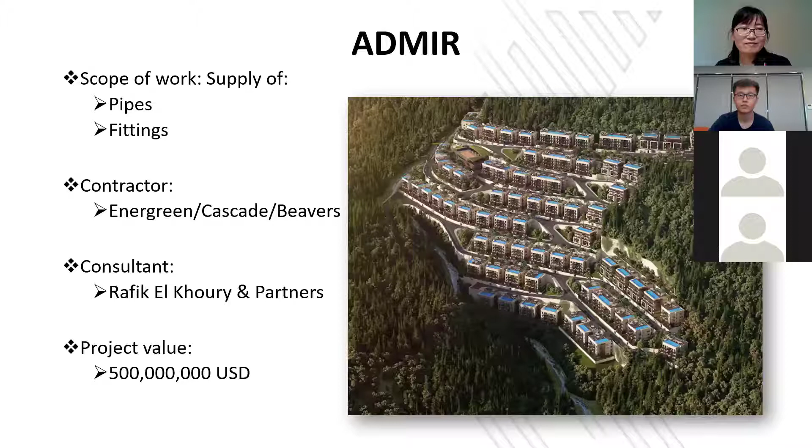So one of the good projects we have is this compound. Our team is highly effective, professional, and talented. It responds to changes in the market. We are an equal opportunity employer, and we invest heavily in the development of human resources and their skills.

We have a large supplier network all over the world, from America to Europe to the Far East, to China. Our headquarters are in Lebanon, but we have also expanded in previous years to Iraq, Ivory Coast, where we have our company, and to KSA as well, where we started and have our team.

What we offer as YARED is service and solutions for the oil and gas field, for MEP contracting and consulting firms. We also have a wholesale retail section in our company, and infrastructure, plus a dedicated team for service and after sales.

Our scope of supply includes valves, manhole covers, pipes, supports and fixtures, HVAC equipment, mainly heating, and pumps, where we represent Grundfos and Peerless pumps. We also supply flanges and fittings, fans, grooved fittings from MEIDE, and fire systems, using extensively our malleable iron fittings and grooved fittings from our partner MEIDE.

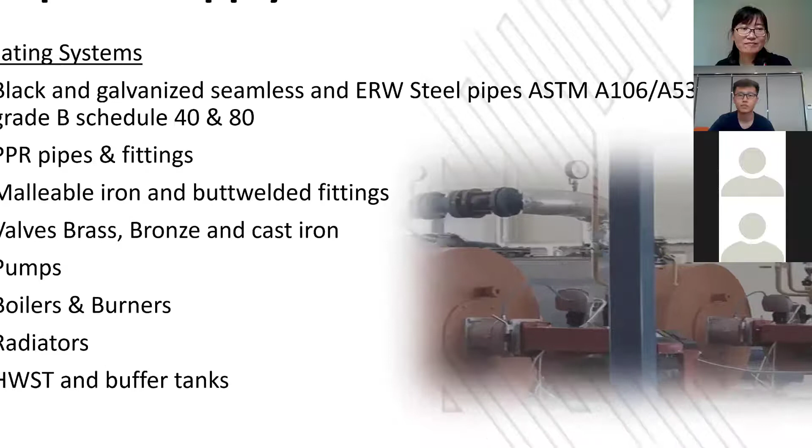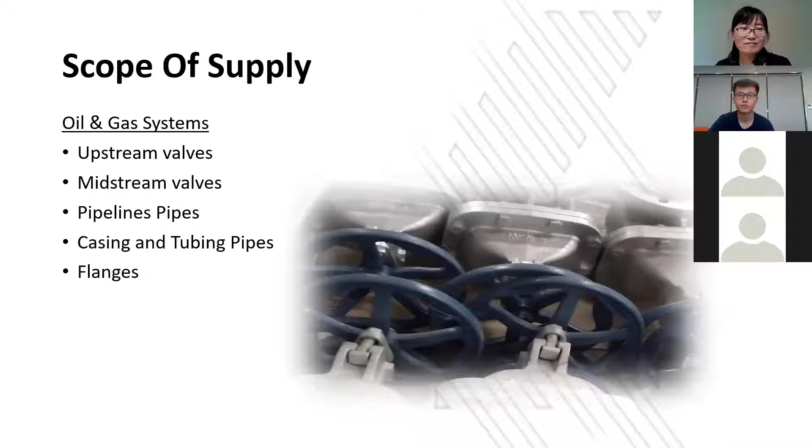We also move into pumping systems and oil and gas, where we can supply upstream and midstream valves, pipeline, casing and tubing, and flanges.

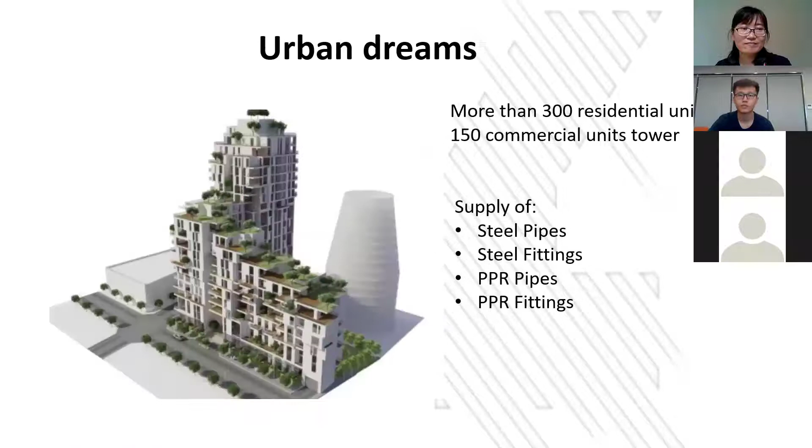In a nutshell, this is our list of projects, many in Lebanon and abroad, where we supplied grooved fittings, malleable iron fittings, steel pipes, and so on. I'll go over them quickly due to time restrictions: Admir, Galleria, Loise Hills, Beit Mesek, Ciel et Jardin in Ashrafieh, Urban Dreams, Centro Mall, Serso, and one of our prestigious projects, the Middle East Airlines Training Center next to the airport, where we supplied pumps and malleable iron fittings to install the pumps as well.

Our facility here in Beirut comprises a state-of-the-art warehouse with offices inside as well as our team.

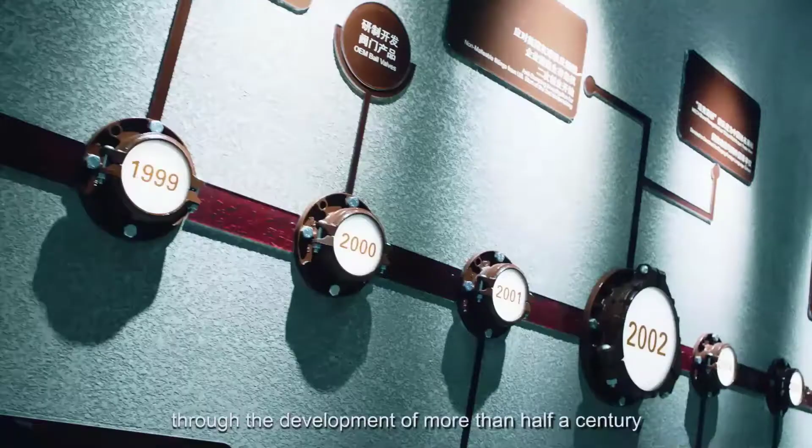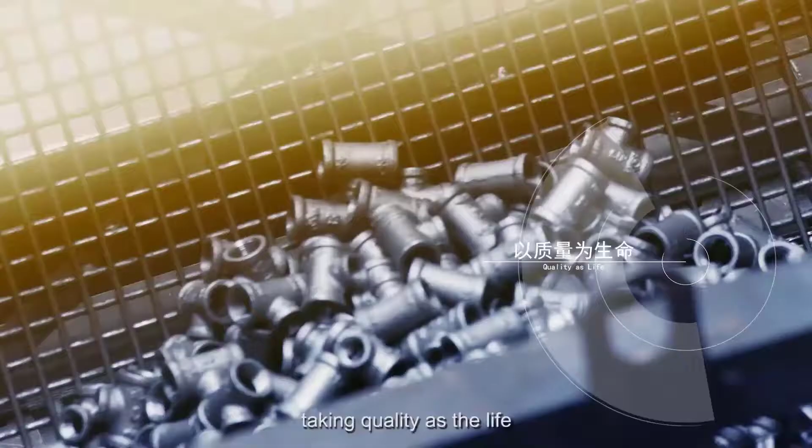Build dreams with original will and forge ahead with innovation. MEIDE Group follows its heart, focuses on each detail, and accumulates strength connecting the world. Gather strengths to connect the world. Established in 1961, through the development of more than half a century, MEIDE Group has become a diversified international enterprise group that focuses on malleable cast iron pipe fitting, grooved fitting, valve, electrical fitting, and ductile iron, and also gives consideration to equity investment. As the leader of the same industry in the world, MEIDE sticks to the core values of putting users first, taking quality as the life, promoting development with innovation, and reaching win-win with cooperation.

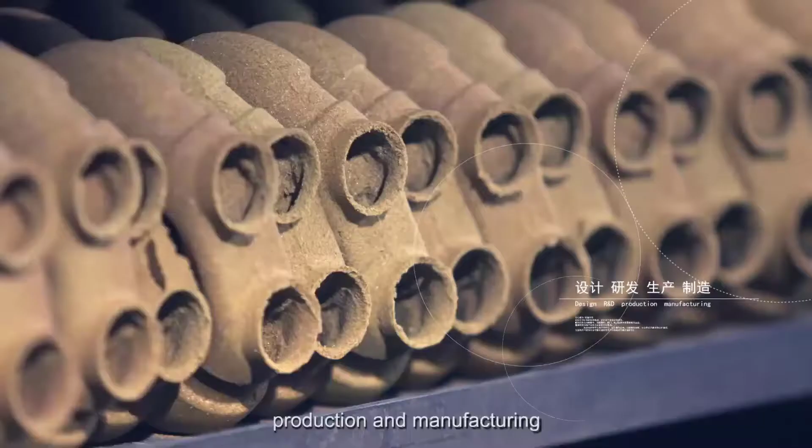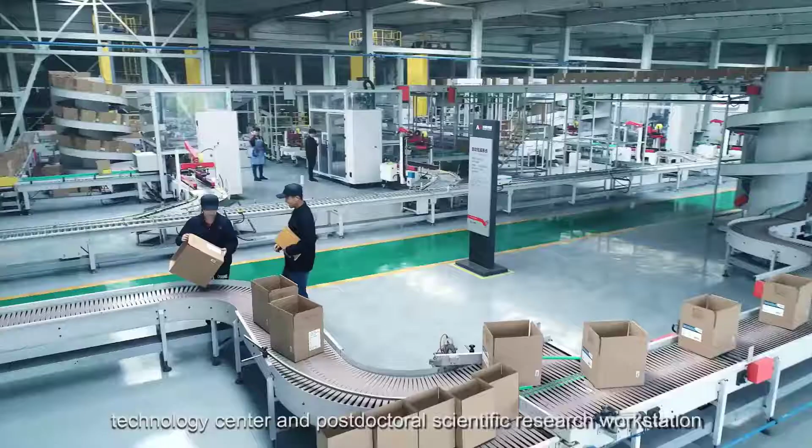Focuses on various sections including design, R&D, production and manufacturing. Extends the upstream and downstream industrial chains and creates high-quality development. It provides reliable products and smart and complete solutions for clients in the fluid conveying industry across the globe. As a national high-tech enterprise, model enterprise of single championship, and green manufacturing enterprise, MEIDE has fully exerted its advantages as the nationally certified enterprise technology center and postdoctoral scientific research workstation, and finished the transformation of production process from mechanization to automation and intelligentization, the transformation of operating management from experience type to institutionalization and process, and the transformation of marketing from selling products to providing solutions.

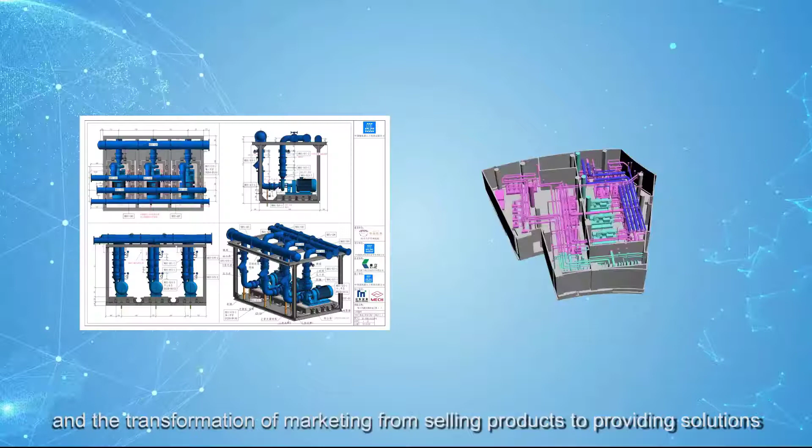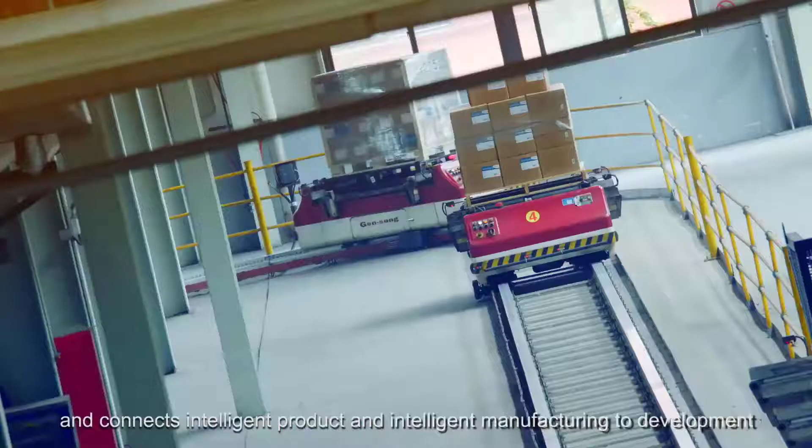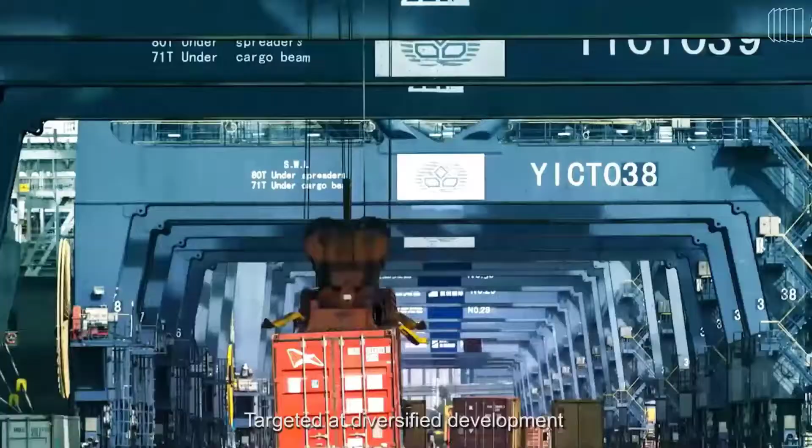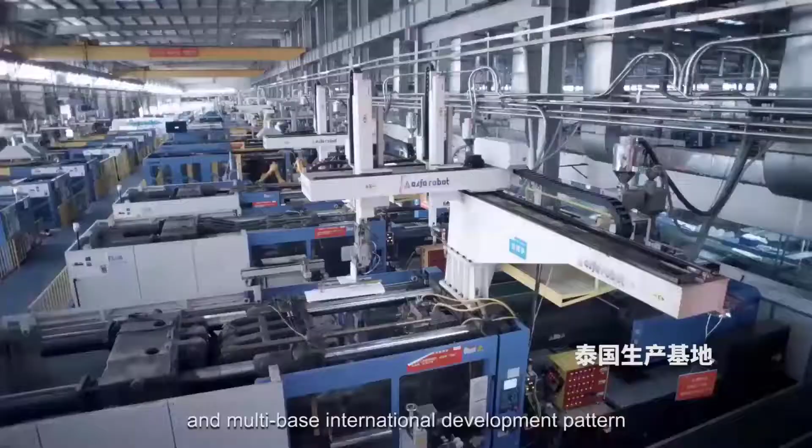It integrates innovation into blood and quality life. It comprehensively starts the double intelligence strategy and connects intelligent product and intelligent manufacturing to development, promotes the transformation of innovative achievements and productivity, and fully improves the brand chain momentum of MEIDE. Targeted at diversified development and global configuration, MEIDE positively brings in international top talents, creates the cross-regional and multi-base international development pattern, and provides high-quality services for global users. MEIDE cooperates with international famous partners to jointly set up world landmarks and realize win-win in the global market.

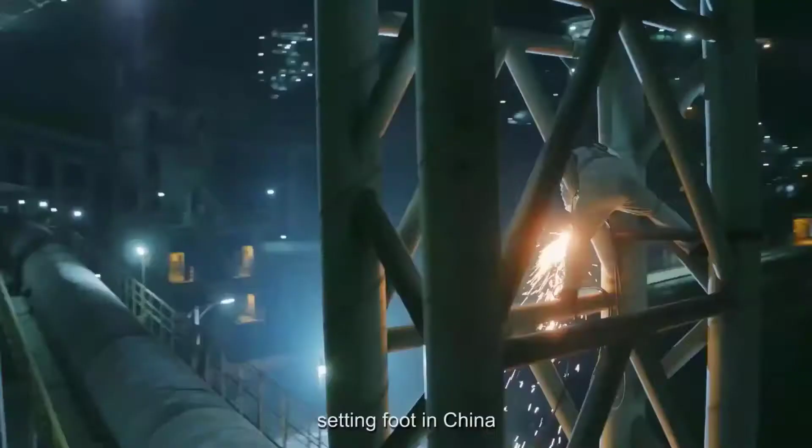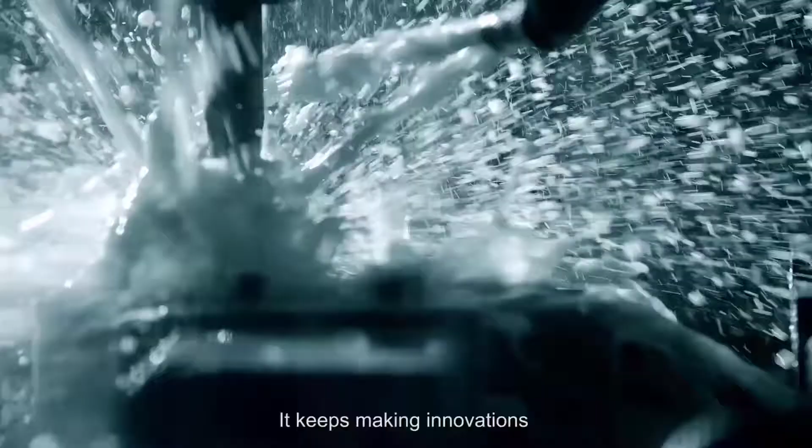Scanning the world widely, MEIDE serves as the national backbone. Setting foot in China, MEIDE undertakes social responsibilities. MEIDE practices environment-friendly ideas and conveys the strength of love in public welfare causes, such as education, urban construction, and poverty alleviation. It keeps making innovations and moving on. MEIDE Group shares with employees, realizes win-win with clients, makes progress with the industry, and attains prosperity with the times.

Now my introduction will cover the following parts, including general information, products, certificates, projects, and etc. Founded in 1961, MEIDE Group has a history of over 60 years. We are committed to providing safe and reliable products, smart and complete solutions for clients in the fluid conveying industry across the globe. Until now, our products are well distributed in 130 countries and regions. In 2019, our turnover exceeded 10 billion RMB, and even under the negative impact of COVID in 2020, we also achieved a 25% increase.

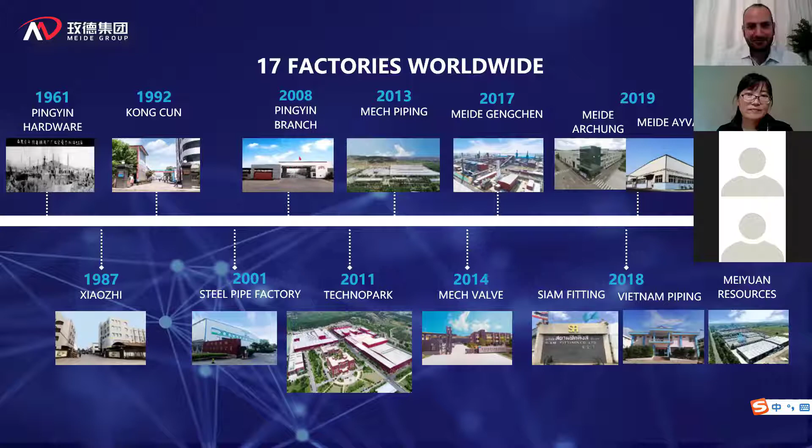So until now, we have 17 factories around the world.

Our products mainly serve 4 major industries: fire, water, gas, and power transmission, and are also widely applied in the HVAC and mining industries.

Compared to other manufacturing factories, we have the outstanding advantage of one-stop service across different industries, including malleable iron fittings, groove fittings, electrical power fittings, steel nipples, valves, steel pipe, stainless steel fittings, flexible hoses, and pig iron.

During years of development, our production capacity of malleable iron fittings, groove fittings, and electrical power fittings is number 1 in the world. We also have the biggest market share in North America for steel pipe nipples.

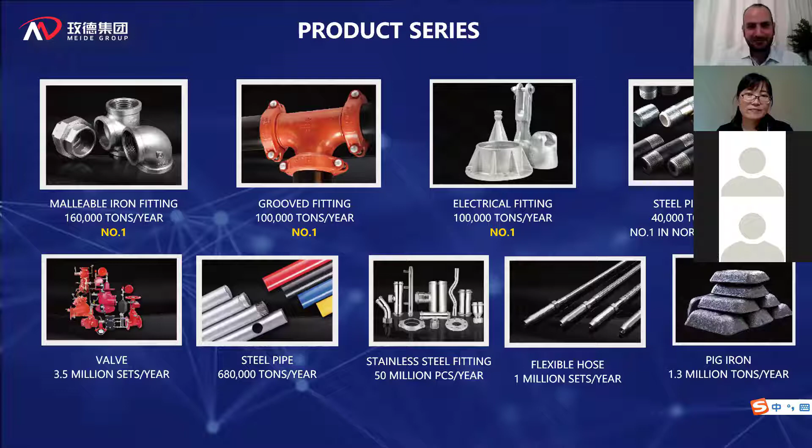As an export-oriented enterprise, export sales take around 2/3 of the total business for major product ranges.

Until now, we are holding altogether 28 global certifications, to meet the different requirements of different industries and markets, like ULFM in fire, NSF, RUS, and Watermark for water. We also have other certifications in different markets, like KC for Korea, ABNT for Brazil, and SANS for South Africa. If you have certificate requirements, you can tell us.

With the joint effort of MEIDE Group and our customers, our products are applied in famous projects in the world, like the Khalifa Tower in Dubai, which used our malleable iron fittings and groove fittings in fire protection, and the Beijing National Stadium, which used our stainless steel pipe and fittings.

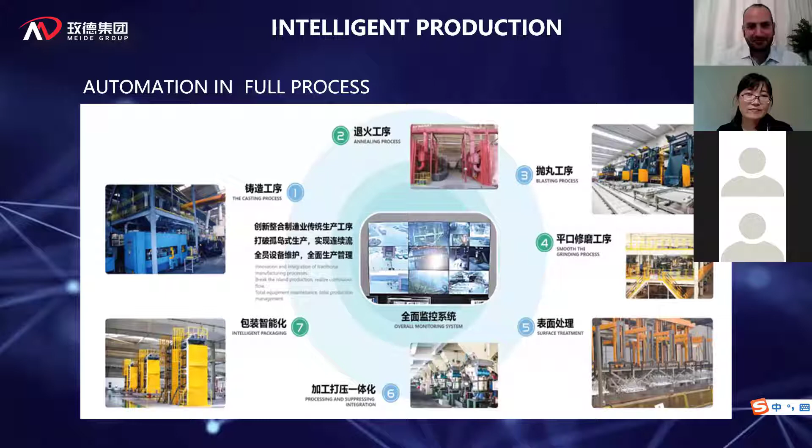MEIDE Group was accredited as a Green Factory in 2018 by MIIT, and we are a leading manufacturer in the foundry industry.

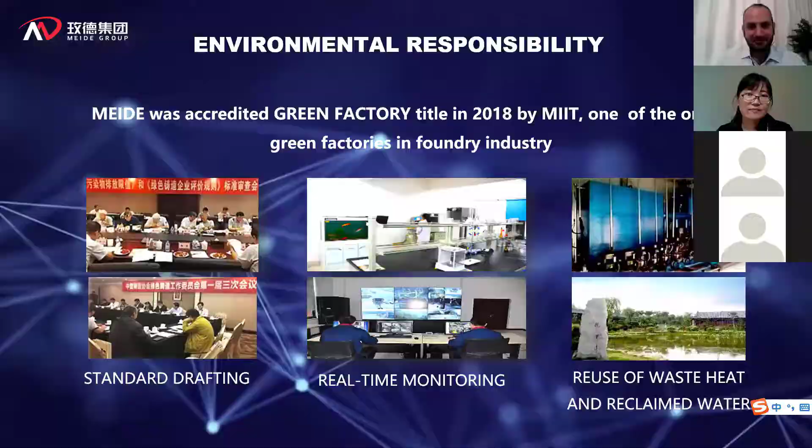Besides our own development, we also pay great attention to public welfare, like education, anti-epidemic efforts, pension support, ecology, and poverty alleviation. Until now, we have donated over 500 million RMB.

MEIDE Group is always committed to being an enjoyed, respected, healthy, and modernized company.

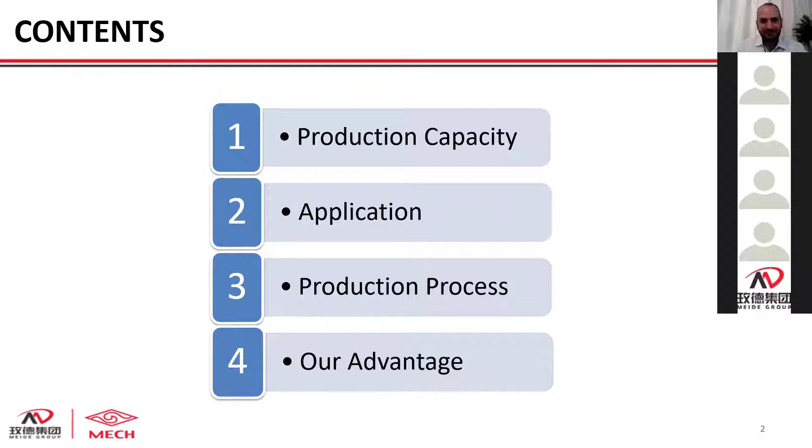First, we produce more than 4 million pieces of malleable iron fittings each day. Question: do you know how long it would be if we connected the fittings together? The answer is 20 times the length of Earth's equator, and 2 times the distance between Earth and the Moon.

Therefore, we are continuously expanding our capacity. So maybe the next target is Mars. Hope this helps you understand us better.

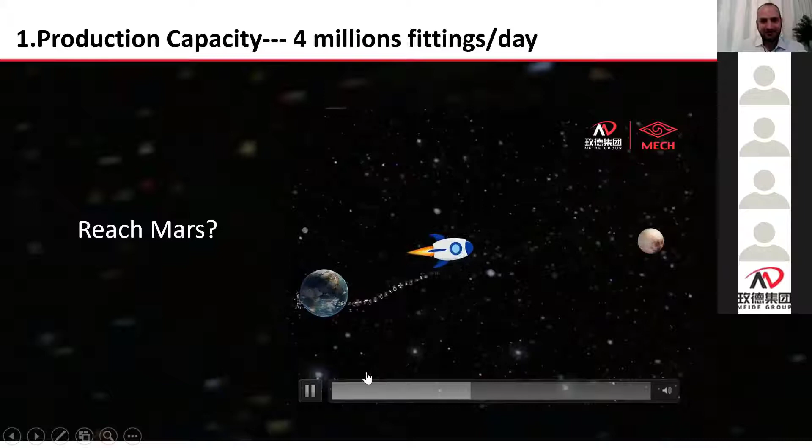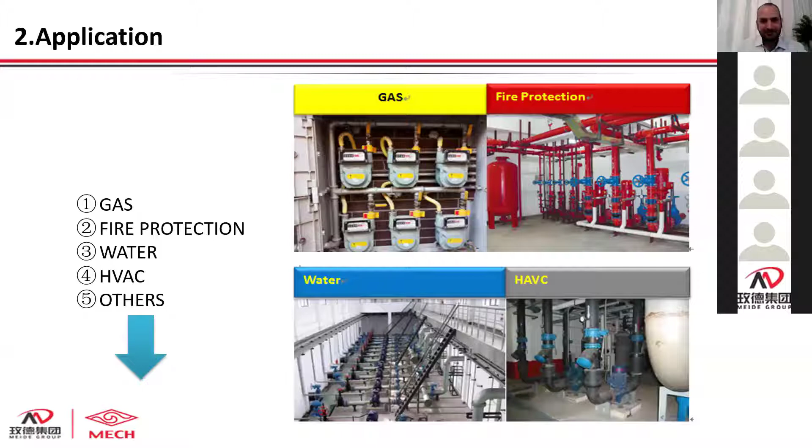Okay, let us move to the next part, application. Our malleable iron fittings can serve many different fields, like firefighting, gas, water supply and drainage systems, HVAC, and others. What about the others? Our fittings are also used in construction, irrigation, and railways.

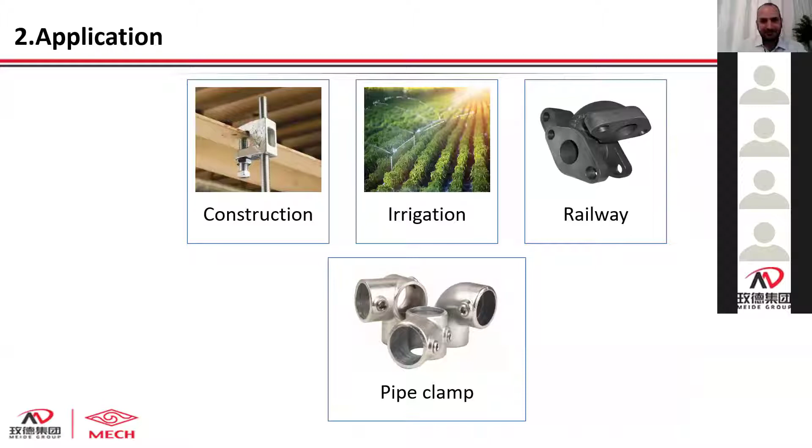We also have malleable iron pipe clamps for multiple uses like greenhouses, furniture, and anywhere that needs pipe structure. Also, our MECH malleable iron fittings are not only the star in the industry, but sometimes also a star in movies and TV series.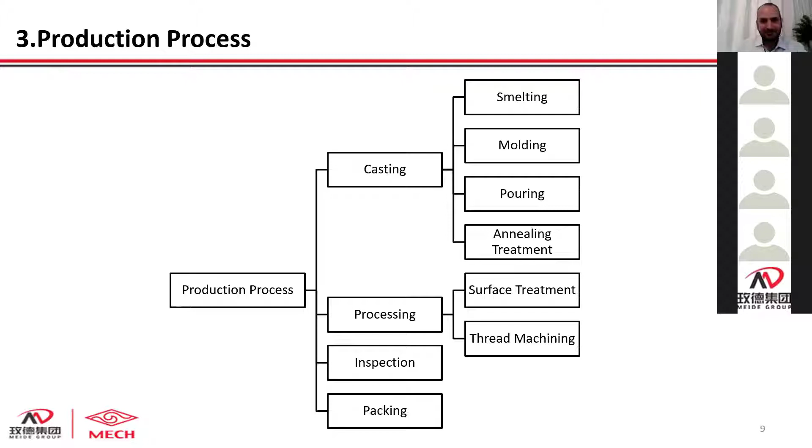First, smelting. Let us check the video clip first.

Malleable iron pipe fittings of MEIDE Group. Production process. 1. Smelting.

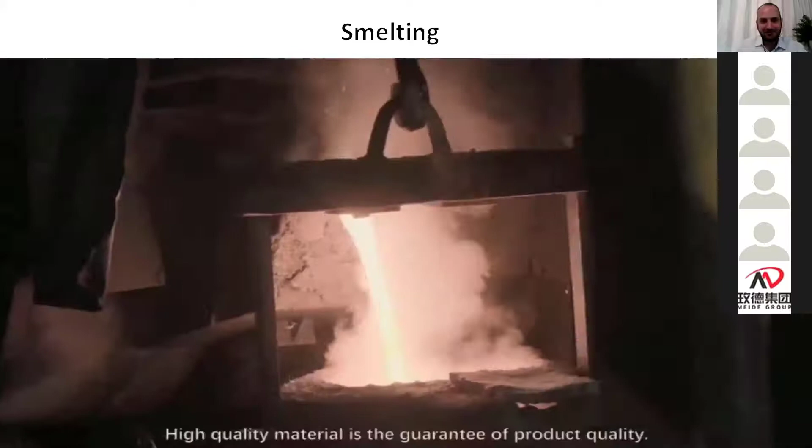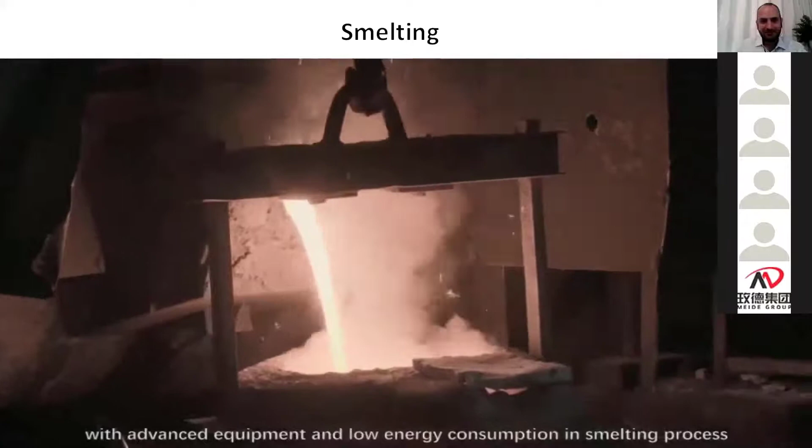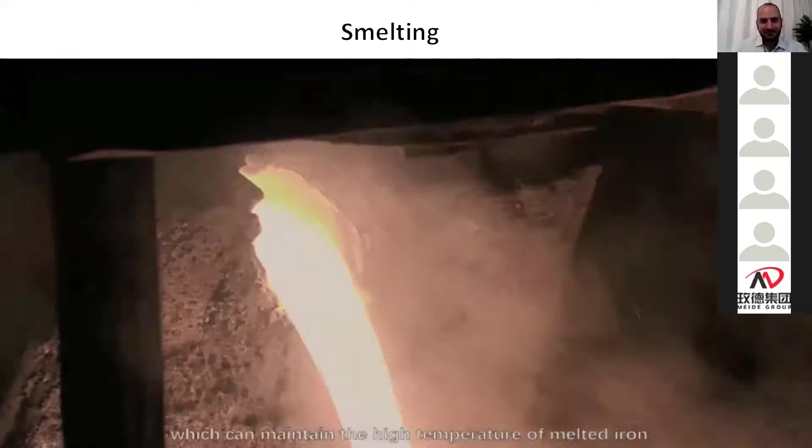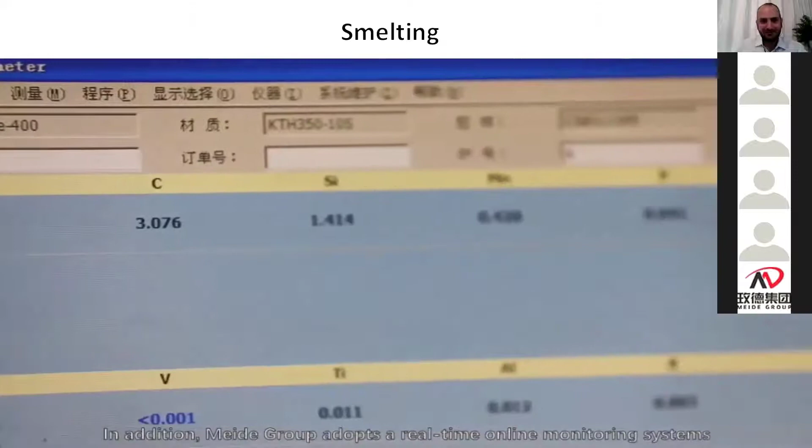High-quality material is the guarantee of product quality. MEIDE Group is the only Class A enterprise in the foundry industry, with advanced equipment and low energy consumption in the smelting process. MEIDE Group adopts the most advanced water-cooled longevous cupola with external hot blast air, which can maintain high temperature of melted iron, stable composition, and pure molten iron. In addition, MEIDE Group adopts real-time online monitoring systems to monitor the composition and temperature of melting.

We use an electrical furnace together with a water cupola. Why are we also using an electrical furnace? First, it could control and monitor the chemical composition and temperature so that we could assure the mechanical performance of fittings. But as I know, some other factories just control by experience; they don't do any testing.

Secondly, it is environmental. Environmental protection is very important. The Chinese government is paying more and more attention to environmental protection control. Many factories shut down because of environmental protection policy, so this is very important for us in order to keep normal operation.

Next step is molding. Actually, molding and smelting are done at the same time. Let's see the video first.

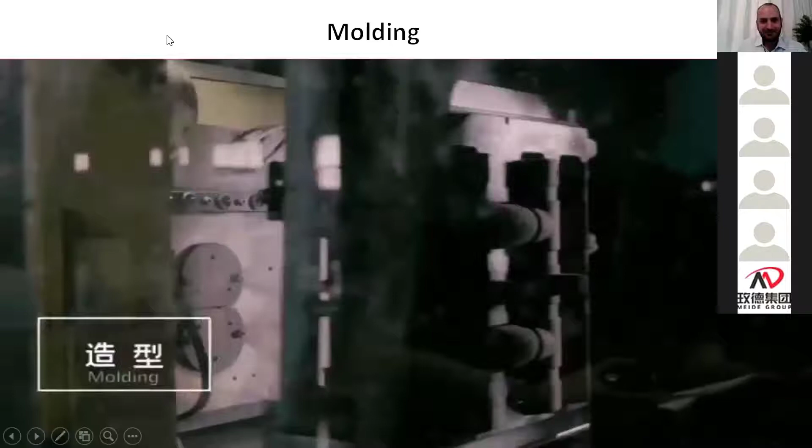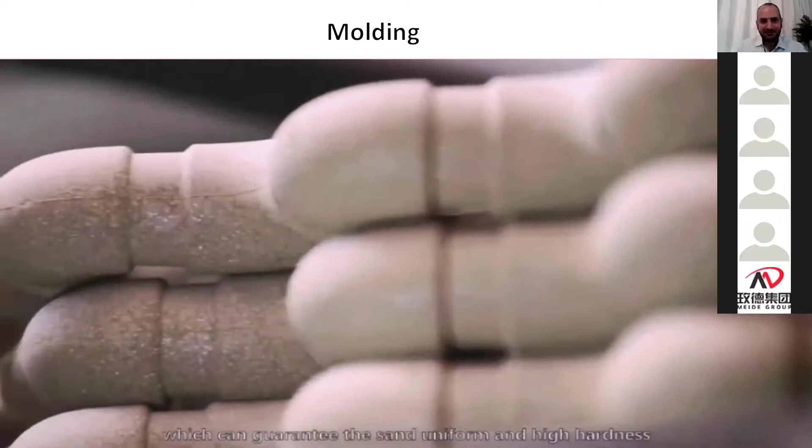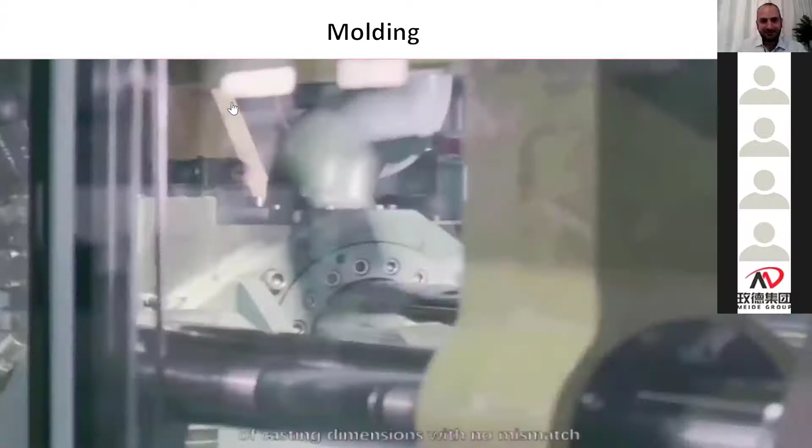Molding. MEIDE Group brings the DISA automatic molding line from Denmark, which can guarantee uniform and high hardness. High precision of equipment and molds ensures the consistency of casting dimensions with no mismatch. Therefore, the casting has a smooth finish and nice shape.

What is DISA? DISA is the most advanced and fastest automatic molding facility. Its efficiency is very fast. It could make 450 box molds per hour, which is equal to 8 hours of work by 3 people. Until now, we have 11 DISA lines in total. This is one of the reasons we can deliver goods quickly.

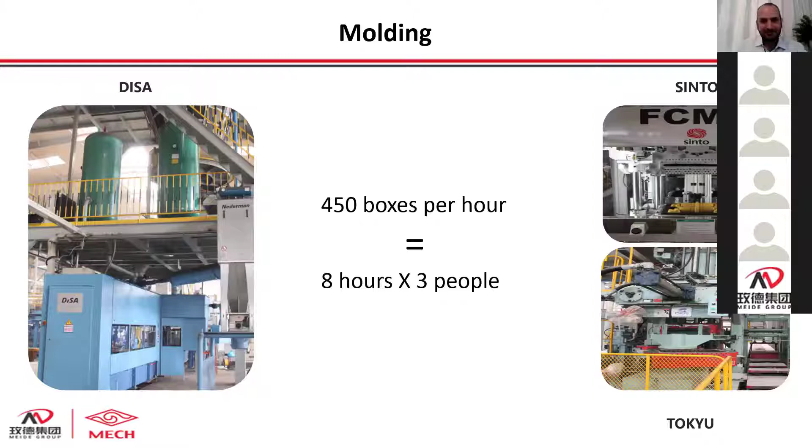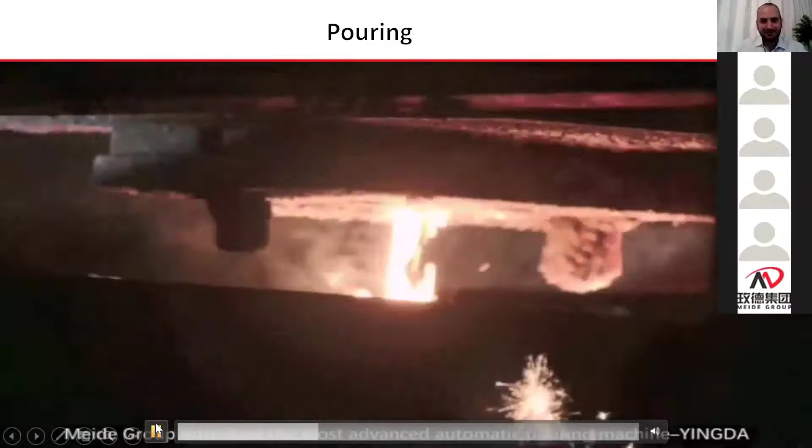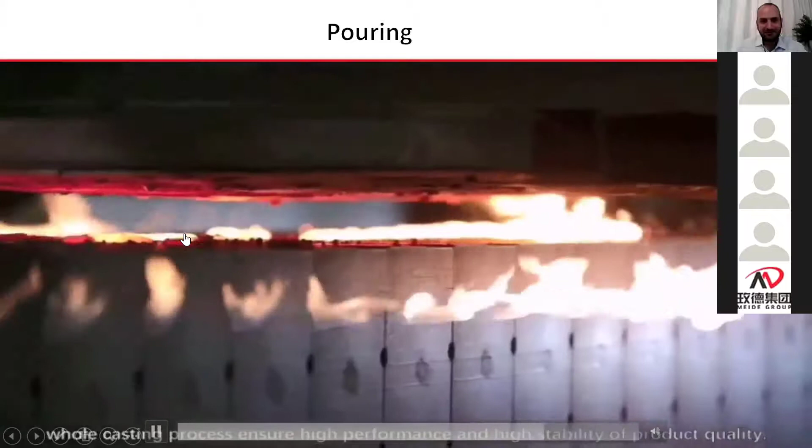Okay, let us move to the next step, pouring. Video first. Pouring. MEIDE Group introduced the most advanced automatic pouring machine, YINGDA, whose bottom gating system helps remove the scum. Real-time online monitoring of casting temperature and automatic whole casting process ensure high performance and high stability of product quality.

While some factories are still pouring by workers, we use automatic pouring equipment. It can inspect the temperature 24 hours, and we adopt a different pouring scale to make sure the purity of the iron water. This is the key.

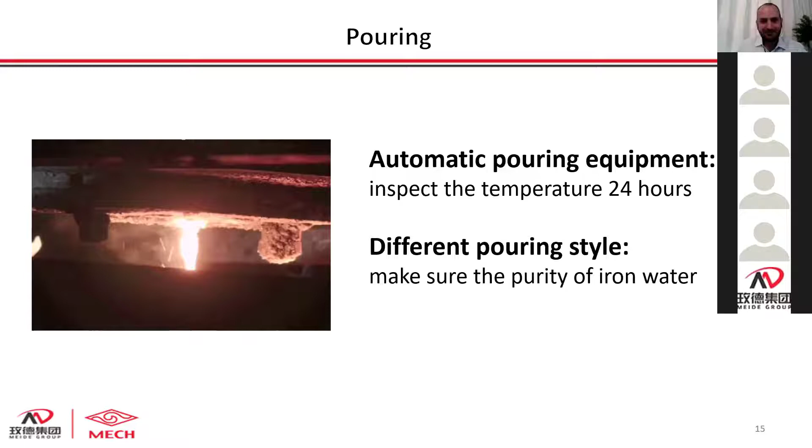The iron water flows into the box from the bottom of the ladle, while others pour from the top. What is the difference? It's like a cup of tea. If you pour the tea from the top, the tea leaves come out together with the water. But if you make a hole at the bottom, only the water comes out. Similarly, we can keep the iron water pure, with no slag, this way.

You may have noticed in the video that this step is divided into 4 temperatures, and the total annealing time is 33 hours. Why is this step so complicated? This makes the fittings not too hard. We call it elongation. Without elongation, fittings are easy to break.

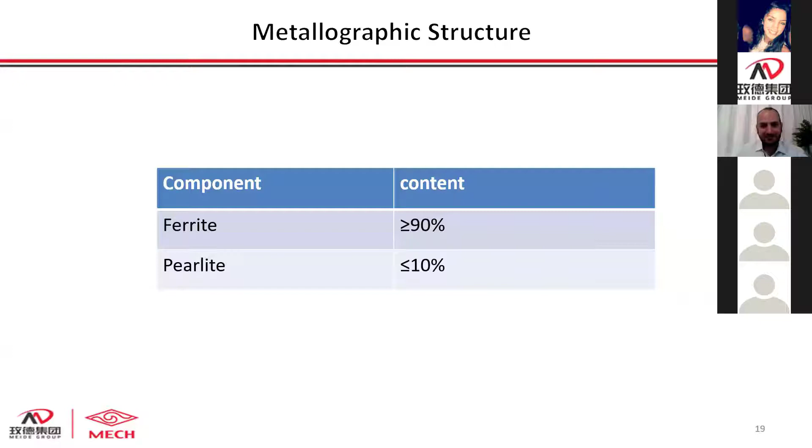But even after we finish the process, how do we know the fittings are qualified? Don't worry, we check them by microstructure and performance. Ferrite makes fittings more flexible; on the contrary, pearlite makes them harder. The proportion must be balanced, and equipment tests the performance as a double assurance.

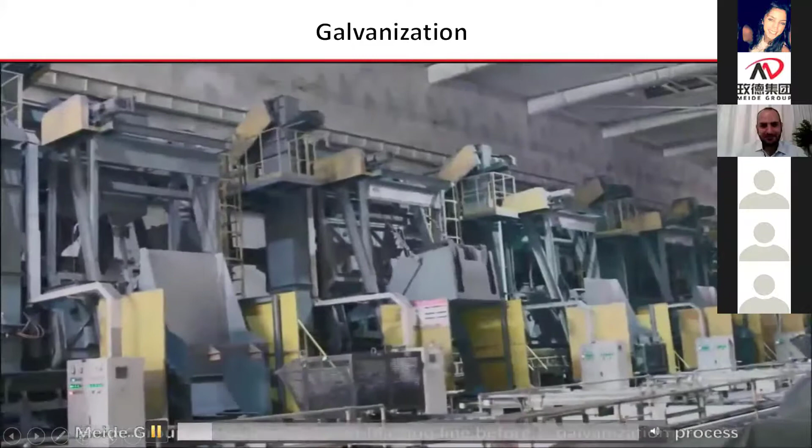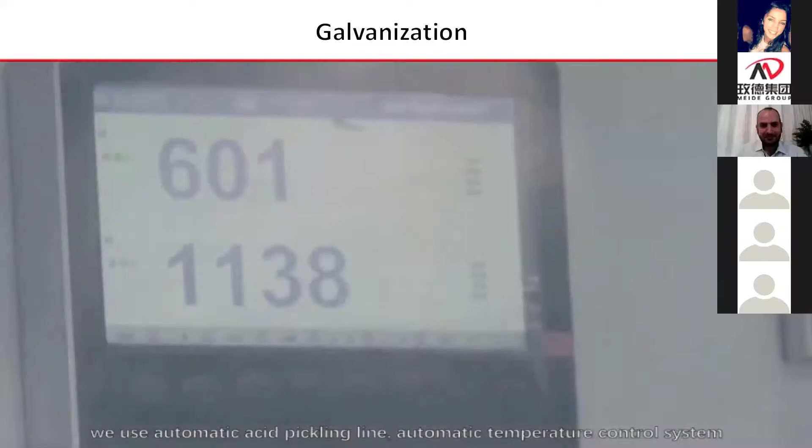Next part is galvanization. MEIDE Group uses an automatic shot blasting line before the galvanization process. For galvanization, we use an automatic acid pickling line, automatic temperature control system, and automatic zinc plating production line.

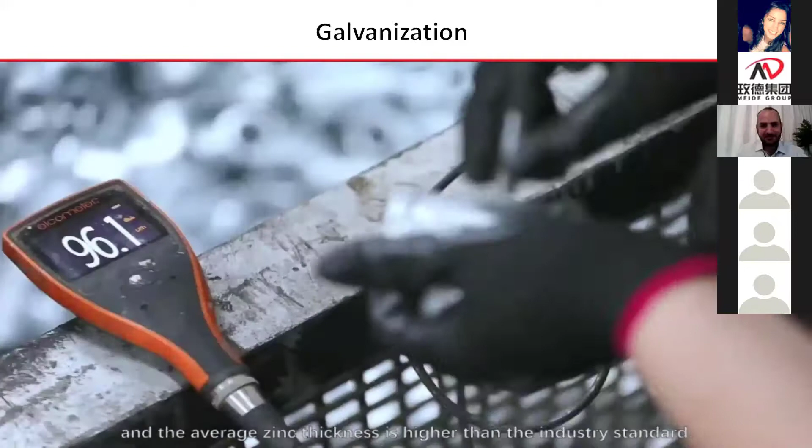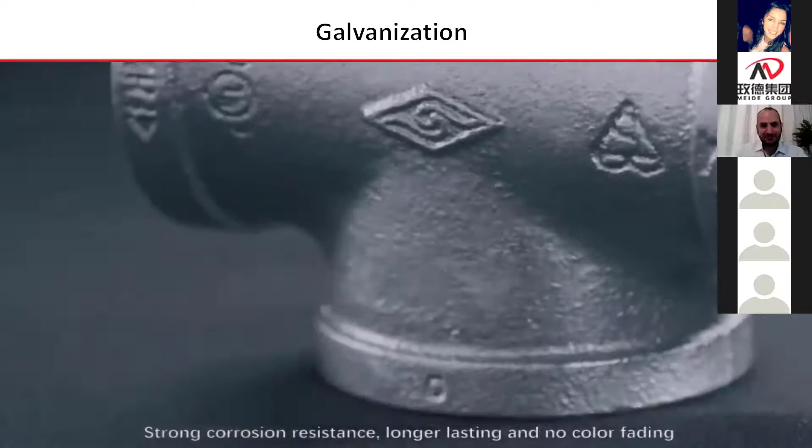The standard detection method and frequency ensure uniform zinc thickness, and the average zinc thickness is higher than the industry standard. This gives good adhesion of zinc liquid, good collision resistance, strong corrosion resistance, longer lasting performance, and no color fading.

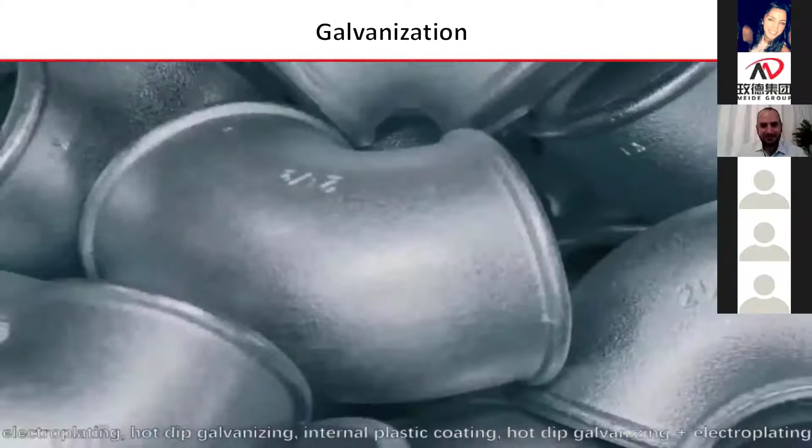MEIDE Group can provide multi-surface products such as black, electroplating, hot dip galvanizing, internal plastic coating, and hot dip galvanizing plus electroplating.

For malleable iron fittings, black and hot dip galvanizing are most popular. We perform strict thickness and adhesion inspection during production, according to related international standards, to ensure the quality of the galvanizing coating.

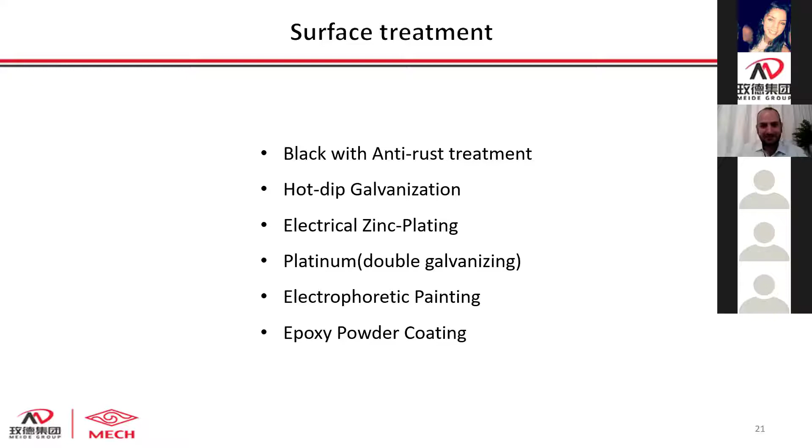Next step, we will give the fitting the ability to connect with tubes. We call it threading machining.

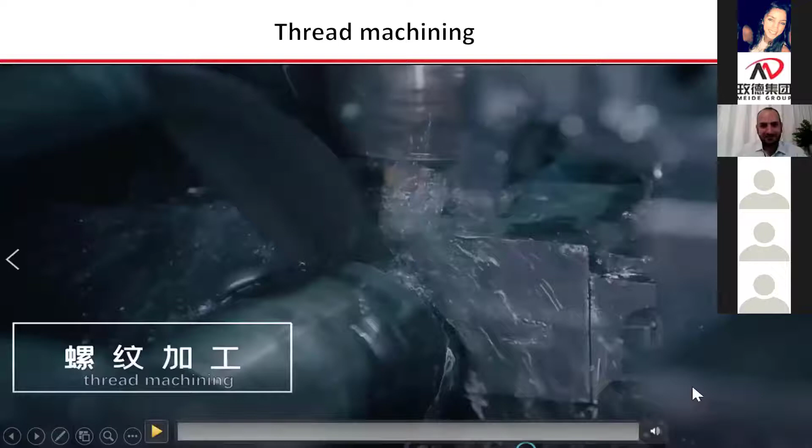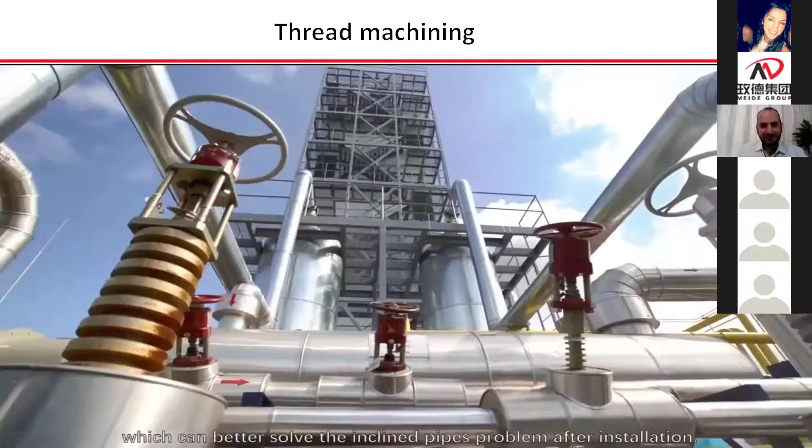MEIDE Group uses an advanced automatic fitting tapping machine for the threading process. We can supply different thread options. National standards stipulate the axis angle needs to be controlled within 30, but we control it within 17, which better solves the inclined pipe problem after installation. Thread taper ratio is 1:16. High precision thread control ensures thread seal.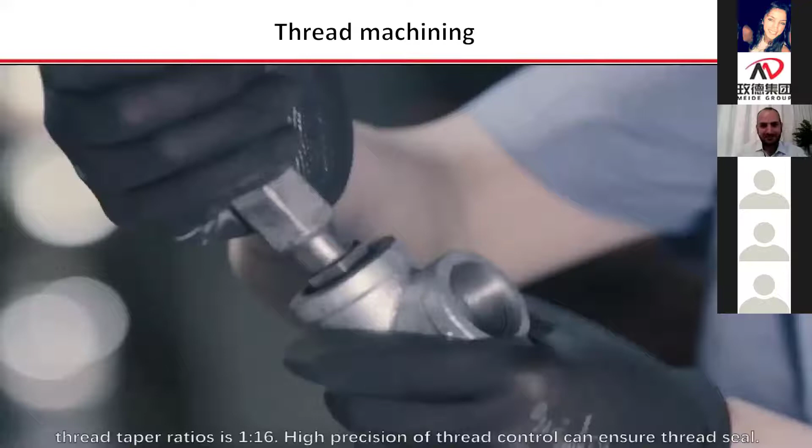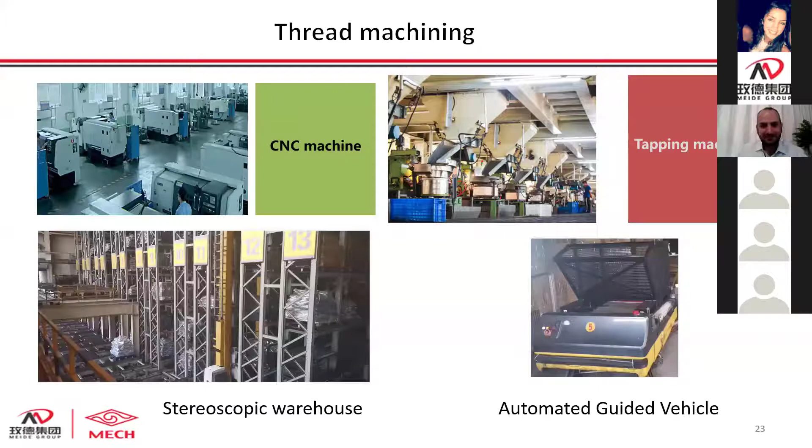Advanced automatic fitting tapping machines and CNC automatic processing machines are used during processing. Finally, we do a 100% leakage air pressure test before delivery to make sure no defective fittings leave our factory.

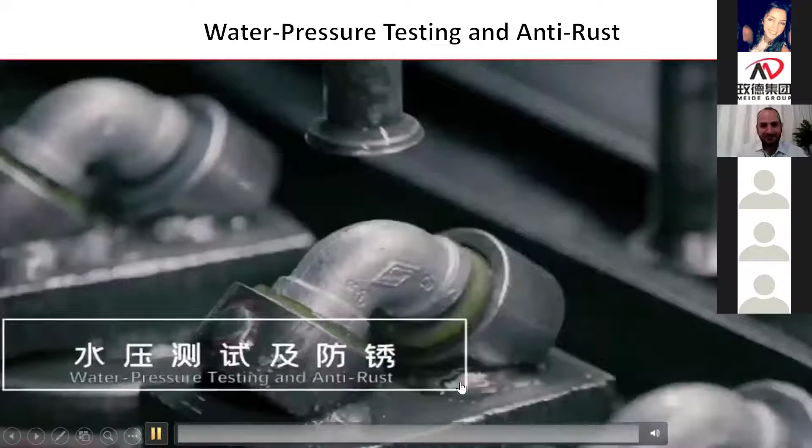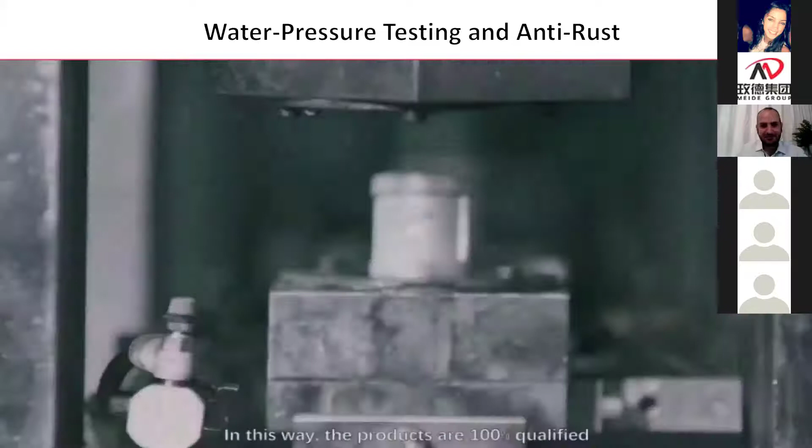Leakage testing and anti-rusting. The finished products are checked by air pressure test, above 0.5 MPa. This way, the products are 100% qualified, and anti-rust oil without aromatic hydrocarbons is adopted to meet quality and environmental protection requirements.

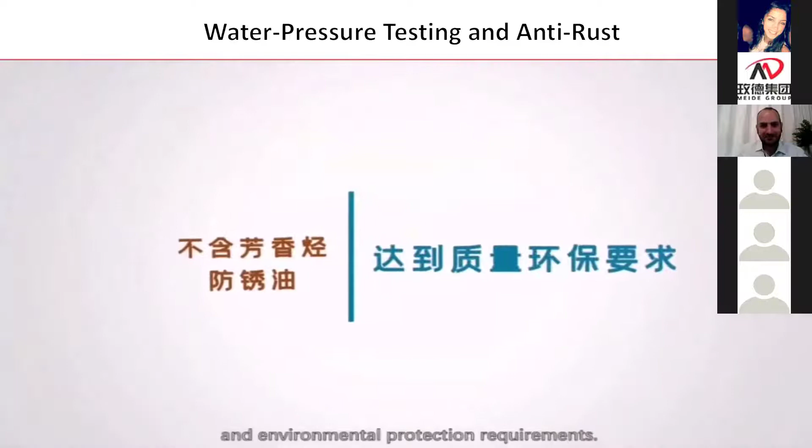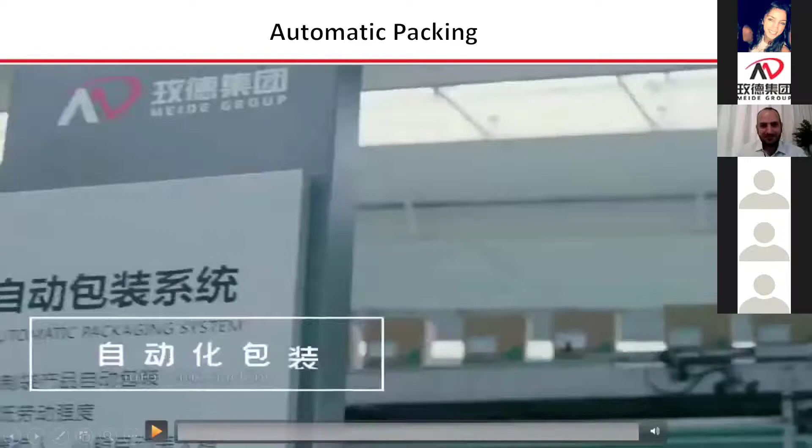The final step is packing. Let us have a look at our automatic packing line. MEIDE Group adopts the automatic packing line, which can guarantee accurate packaging quantities and consistent appearance.

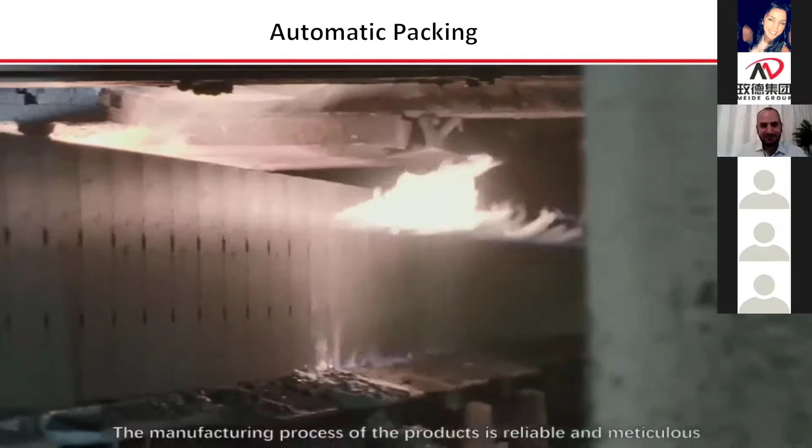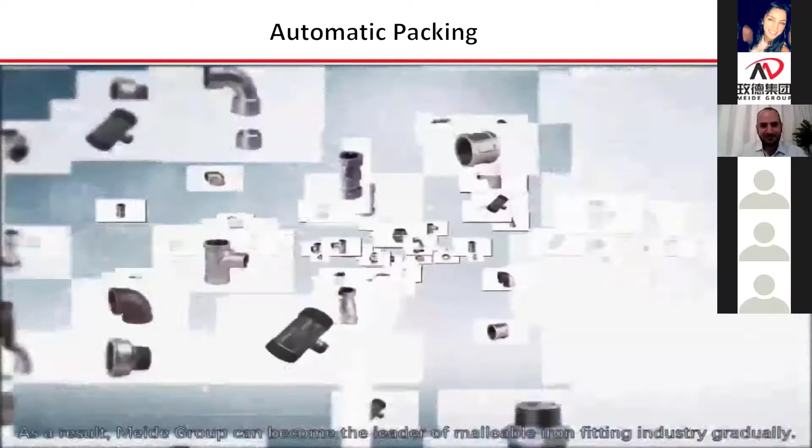The whole production process of MECH brand malleable iron pipe fitting has 36 quality control nodes. The manufacturing process is reliable and meticulous, and each product is 100% qualified for delivery. The products are distributed in more than 170 countries and regions. As a result, MEIDE Group has gradually become the leader of the malleable iron fitting industry.

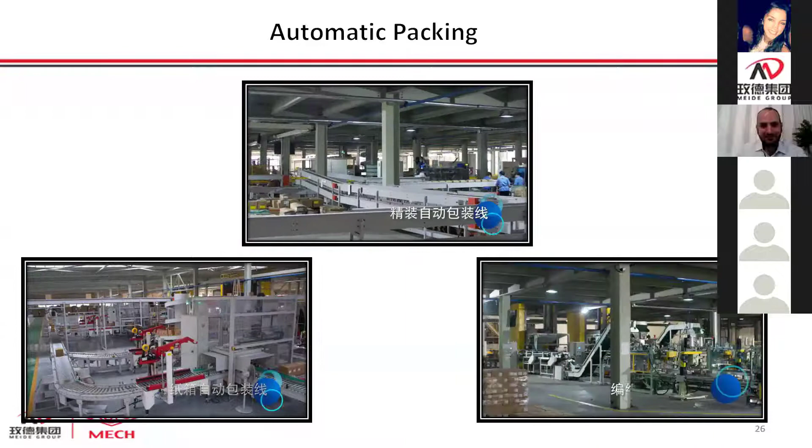That is all the parts for our production procedure. Now I will summarize the points of our advantage. The first one is full standard. We have different standards like BS standard, American standard, and DIN standard, with different options available like dimension, threading, and pressure rating.

Different standards have an obvious difference in appearance. For example, American standard and BS standard are banded. American standard is much heavier, while DIN standard is beaded. You can clearly distinguish them from these three products in these pictures.

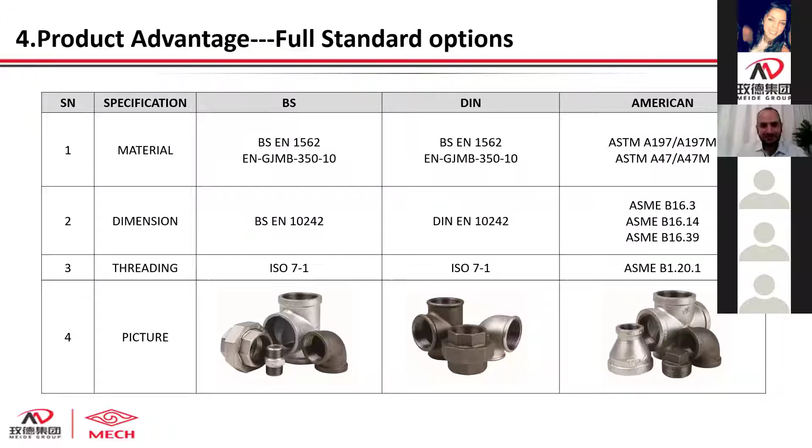I understand that everyone cares about quality control. By knowing our production process, I believe you have seen how we manage quality control. We make inspections during 9 key processes and do 100% leakage air pressure testing before delivery, to make sure no defective fittings leave our factory. Our product liability insurance limit is up to $2 million, which is the highest in the industry. All this helps us establish a stable, long-term, and mutually trusting partnership with our customers.

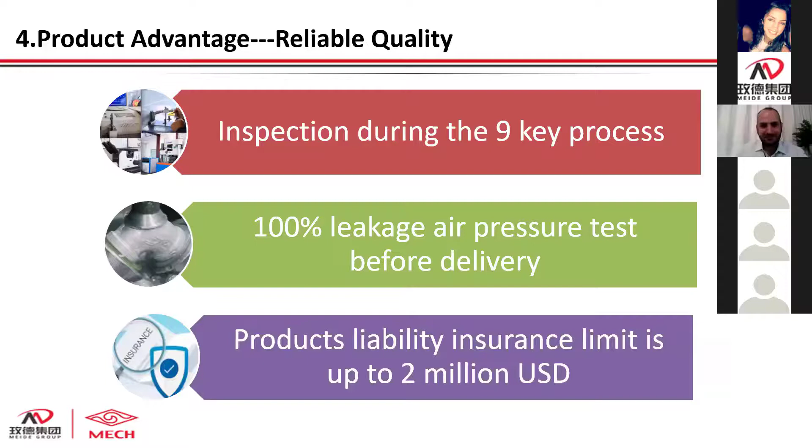Next, global certification. We have obtained many approvals and certifications from different nations and areas, which provide convenient conditions for our global sales. We achieved UL/FM certification for fire protection applications, DVGW for gas applications, and NSF for water. We also have industry certifications like CE for Europe, KS for Korea, and EAC for Russia and nearby countries. That means we can sell to places around the world.

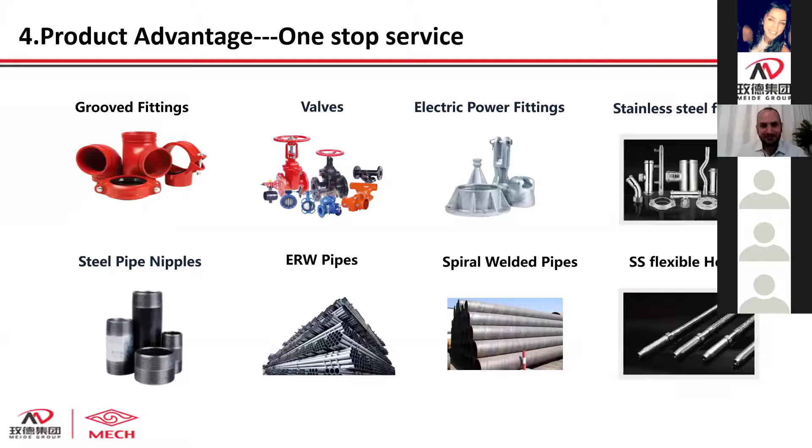One-stop service. MEIDE Group aims to provide complete products and one-stop service for our clients in the fluid conveying industry across the globe. We have grooved fittings, valves, electric power fittings, stainless steel fittings, steel pipe nipples, ERW pipes, spiral-welded pipes, and stainless steel flexible hoses, among others. Our product range is very rich, with more than 800 product specifications. We provide the most complete range of products from 1/8 inch to 6 inch, offering simple and economical solutions to meet users' needs.

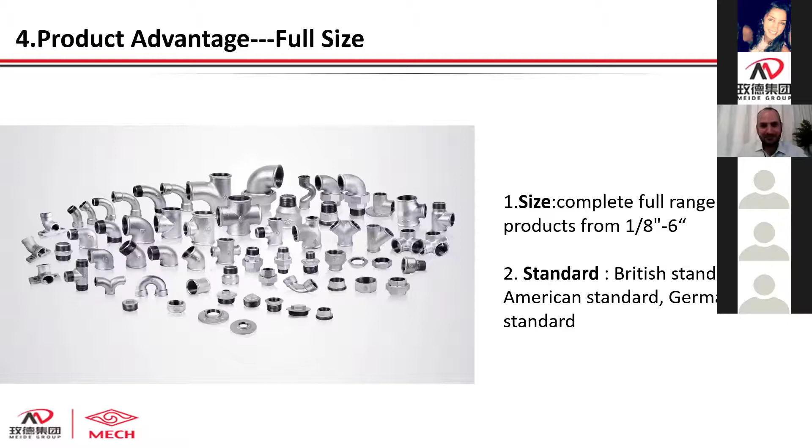Besides quality, the most important issue customers always care about is stable delivery date. Our normal delivery time is stable at 45 days. Of course, we have the ability to make faster delivery for special and urgent requirements. MEIDE Group is the largest malleable iron fitting manufacturer here, the only Class A casting company in the industry in China. That means we can keep stable delivery capacity. Even during the past 1.5 years with the epidemic, we never stopped production. This is also one of the biggest reasons we are favored by big international customers.

Finally, let me make a conclusion about our advantages: first, full standard options; second, reliable quality; then global certificates; we offer one-stop service and full size range; and stable delivery. This is all the content I want to show you today. Thank you for listening.